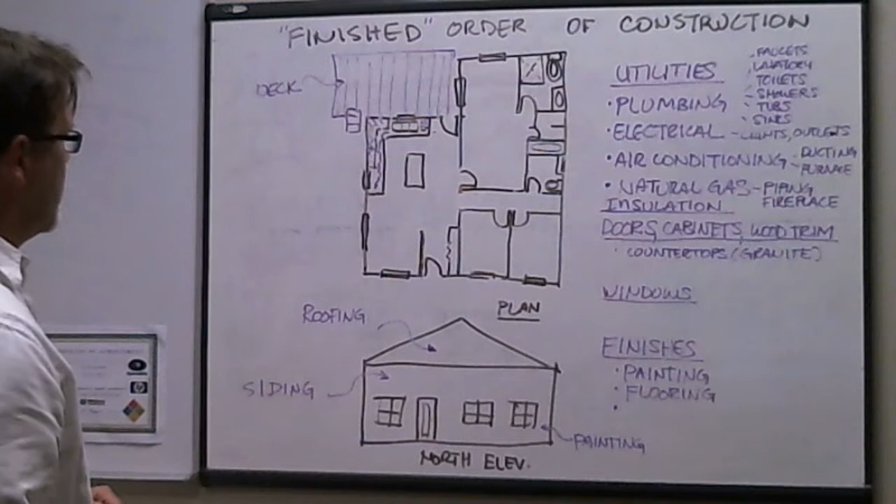Those bits and pieces are essentially what I'm going to talk to you about tonight, which is what I'm calling the finished order of construction. Up here you can see what I've provided: a floor plan as well as an elevation, which I'm calling a north elevation. I want to have a discussion and briefly share with you some of the things we're looking at that will infill that rough order of construction we talked about earlier in the week.

So the first thing that we want to think about, and that you should need to think about in planning to build this home, is utilities. As you can see under utilities, there are a number of things we want to talk about.

The first is plumbing. When you look at my floor plan and think about plumbing, you need to run all the piping to all the parts that require water. So you'll be providing water and plumbing to faucets, lavatories, toilets, showers, tubs, sinks, anything that requires a water supply will be part of the finished plumbing. You need to make sure you have that scope of work covered.

Also, water needs to be removed from the home. So you need to identify water closets and the plumbing piping that will carry water to the sewer line, which then expels and removes that water from the home. You need to make sure you have piping for the sanitary part of the home. That's the plumbing component piece.

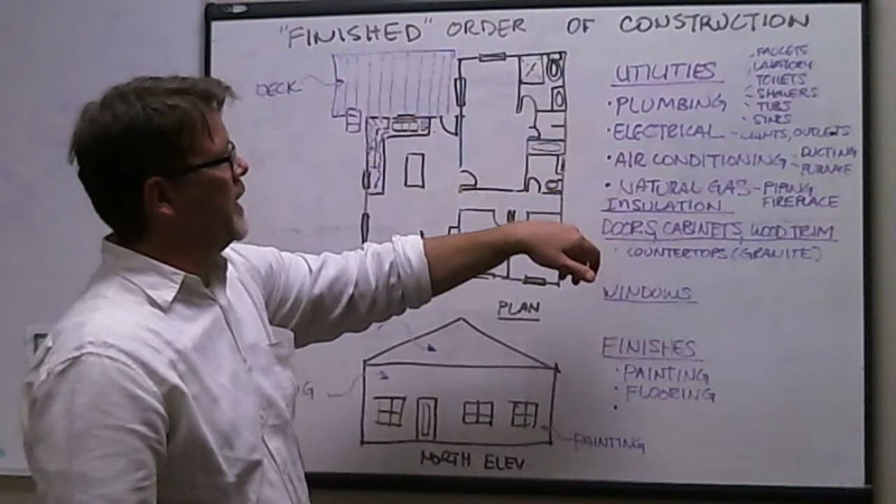With electrical, like plumbing, you've got to provide the wiring and cabling that feeds the sources requiring energy, which are light fixtures and power outlets. So you can see here with the electrical I've noted lights and outlets. Each room is going to need a light and power outlet. Throughout the home, you'll need to do a cost estimate on what it will require to do the electrical wiring and cabling work, as well as the type of fixtures you'll select for your plan.

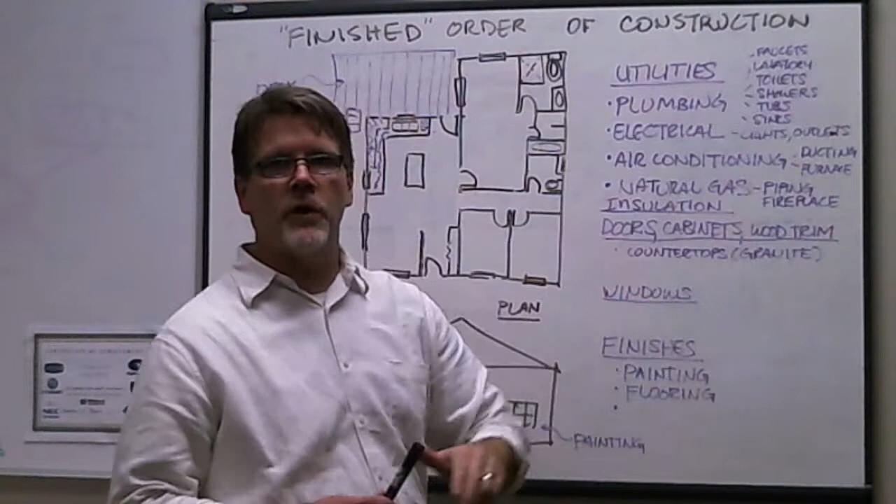Next is air conditioning. Each home needs to have air circulate inside of it. So when you look at air conditioning, we're talking about providing ducting and perhaps a furnace that will take the air and push it through the home. You don't need to get too advanced with this plan, other than perhaps doing some research on what it might cost to run ducting in a small house like the one you're preparing for the Pulliams, and getting a square foot price for that.

And then as well, maybe go to Home Depot and identify what the costs are for a simple furnace that will be able to heat the air and push the air throughout the home.

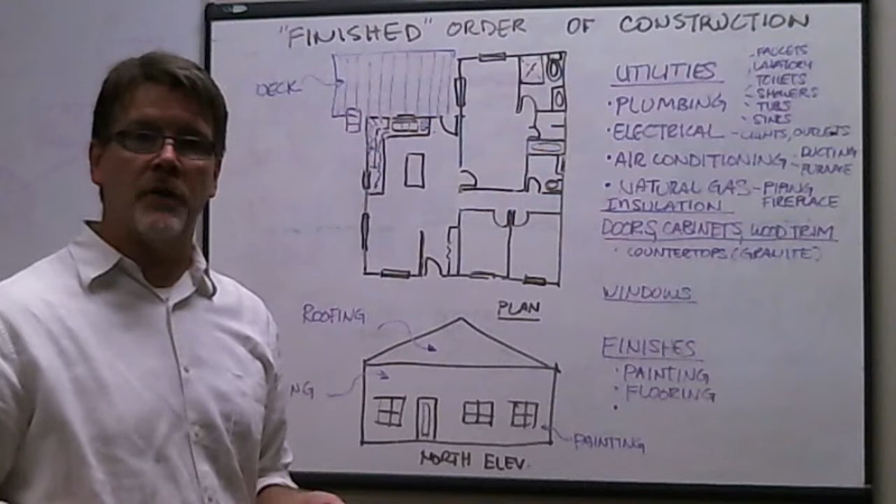One of the things also to consider is the need for air conditioning. In the state of Washington, where the home is being contemplated to being built, more than likely there will not be a need for an air conditioner. So as far as requirements go, I believe that the Pulliams will not require air conditioning, but definitely they will require a furnace.

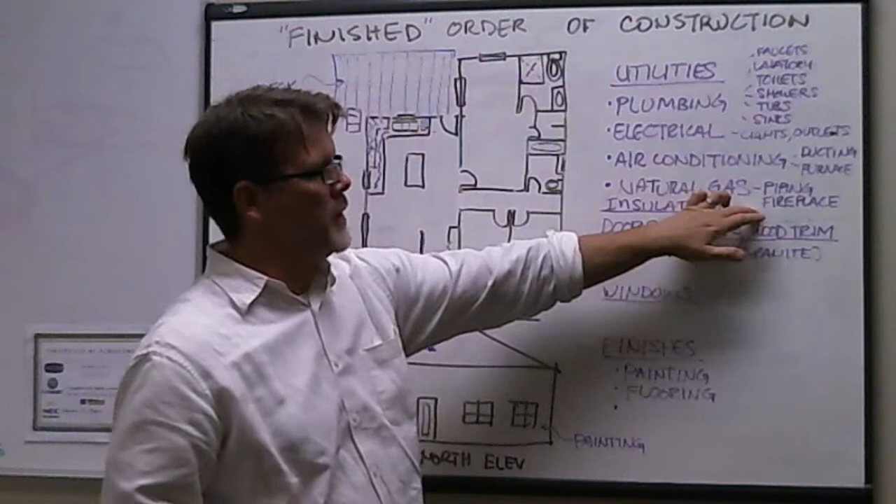When we talk about piping, as we did with plumbing, in addition, there's going to be natural gas that will be supplied to the home. So with natural gas, you have additional piping that needs to be provided, piping that would be needed for the gas stovetop, because that's where we want to supply natural gas for cooking, as well as natural gas to the furnace to heat the air on cold days, and piping to a fireplace. I don't show it here on the plan, but there is a fireplace in the Pulliam residence that we want to be sure they have, so you'll want to make sure we have the natural gas piping for that particular feature.

Okay, so that in a nutshell, roughly, are the utilities that are required for a home.

Speaking further to some of the more finished order items that we need to identify, one is insulation. Certainly throughout the home, we're going to want to make sure that it's insulated, so on those cold days it doesn't get cold inside the house, and when that furnace is operating, people will be able to stay warm.

Doors, cabinets, and wood trim. You can see on the plan that we've got doors identified in certain areas. With those doors, we want to make sure that you've got the rough count of doors, and that the doors need to have hardware, so the doors have hinges, and doors will also have knobs on them, so you will be able to get in and out of the rooms that are part of the house. So we want to make sure that you've got doors as part of your finished order.

Also, cabinets. Here in the kitchen, you'll see that there's kitchen cabinets, and a center cabinet for the family to engage. Now, again, I might remind you that this isn't a real house that we are looking at, this is only for example purposes tonight to share with you the finished order. But you'll see that you've got cabinets, and you'll note too that the restrooms will have lavatories. So you'll want to make sure that you have lavatories covered in the restrooms, which is a cabinet in and of itself. Be aware of these types of features that are part of your finished order.

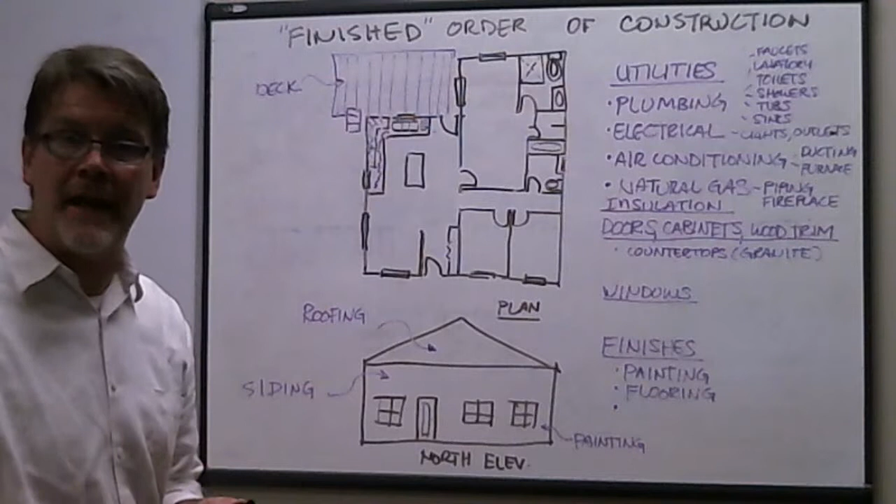Quick note on exterior finishes. Note that you need to have a roof, so there needs to be a roof deck, and you need to install a roofing material that will protect the top side of the home from rain and snow. We'll also want to make sure that we've got exterior siding, so how you choose or select an exterior siding that you think the Pulliams would prefer, or maybe you give them some options, make sure you have that discussion among your team.

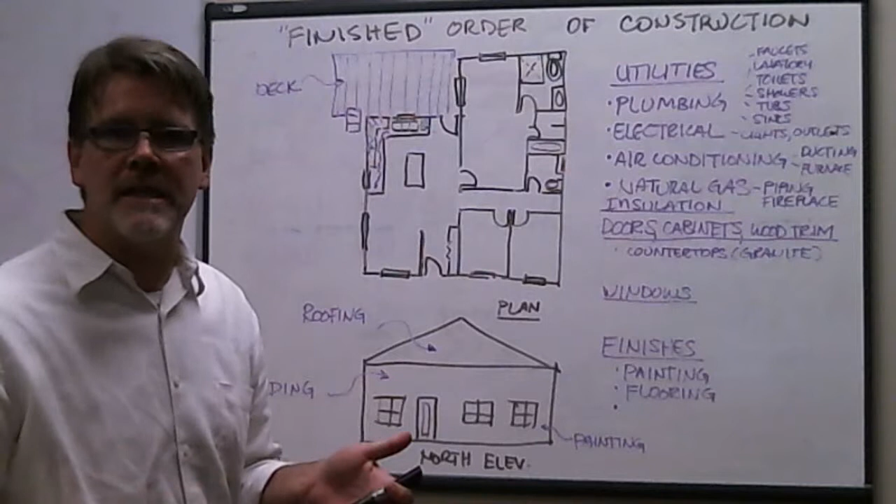And lastly, we want to think about painting for the exterior of the home. So depending on the type of siding that you get, let's say you get a cedar siding or some sort of composite wood siding, when you install that wood siding you'll want to finish it with a particular paint, and that would be something that you will want to price.

Now, as far as colors go, I wouldn't concern yourself with colors. Colors can always be selected after the fact. So let's just make an assumption that when it comes to the type of color for the paint required by the Pulliams, that will be a decision made after the selection of the project team.

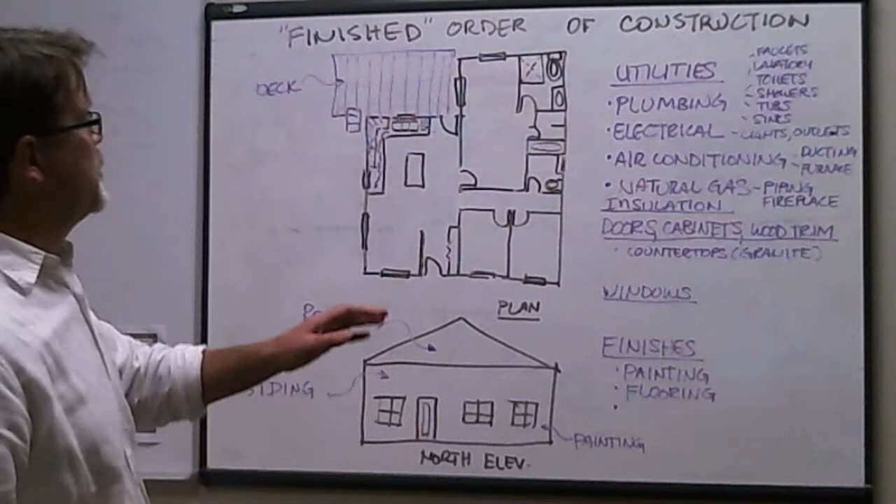The last thing I want to note is that I do identify a deck. I know the Pulliams are very interested in having an outdoor deck. So if you do find a home that you have selected that shows for an outside deck, please make sure that you identify that as part of your scope of work. Include that in your work breakdown structure, and you'll want to make sure that you've got the materials and estimates needed to show for that nice feature on that home.

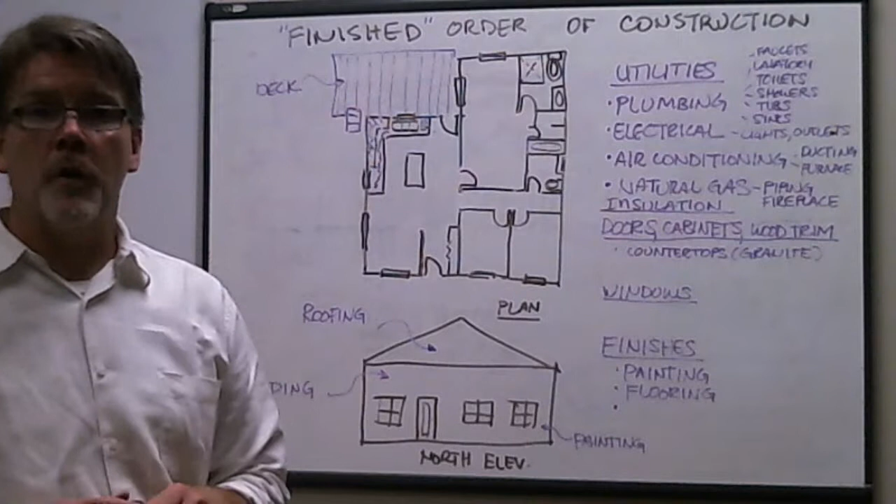So that in and of itself is the finished order of construction. And I really do hope that this has helped you out. I hope that earlier in the week when I did the rough order of construction, that gave you some brainstorming ideas of how you want to put together that work breakdown structure.

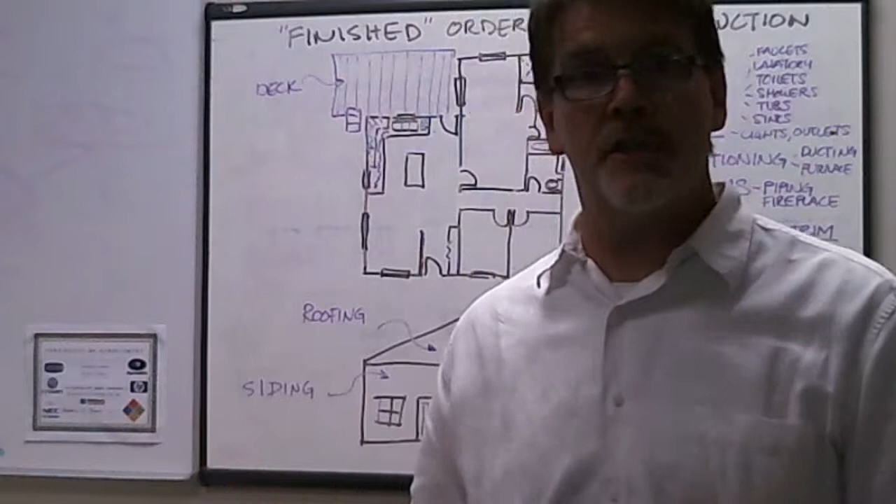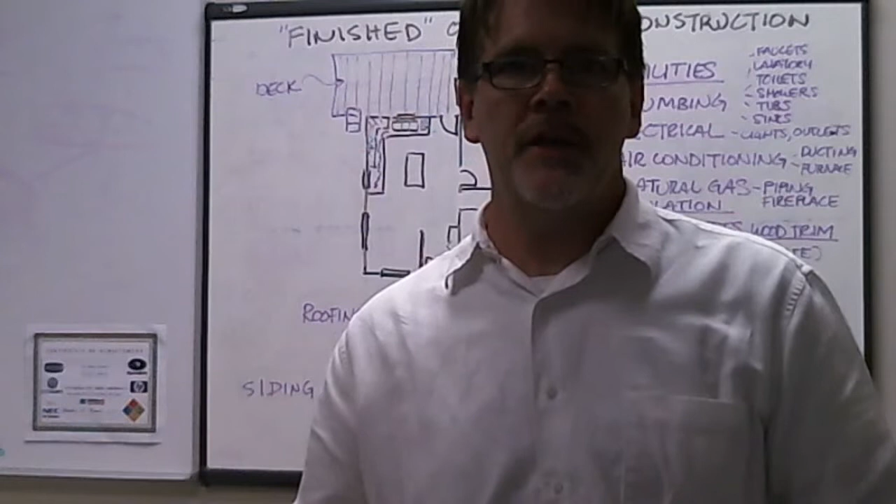I'm going to be doing a risk management exercise.